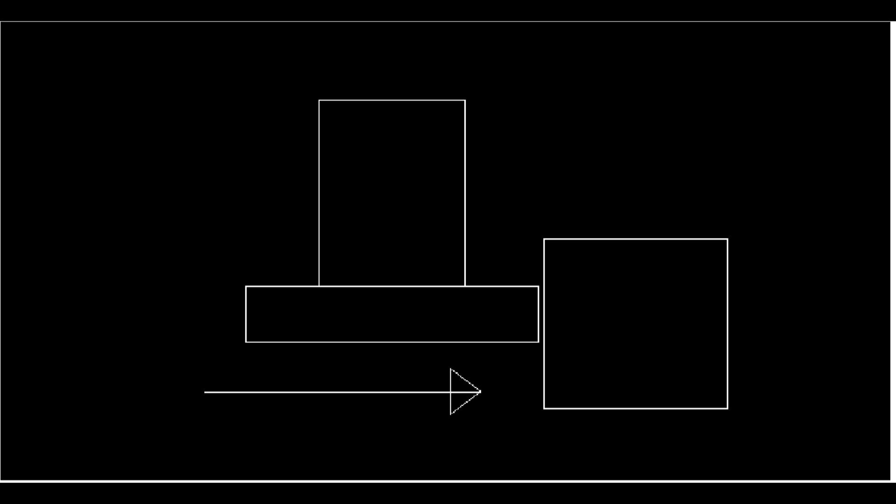Since you can cut in either direction, horizontally or vertically, there's of course going to be a different cutter setup for each of them, and I'm going to explain the horizontal first. A slitting saw would be a good example for this. Every cutter has several things in common. They will all have a rake angle, and they will all have some sort of a relief angle.

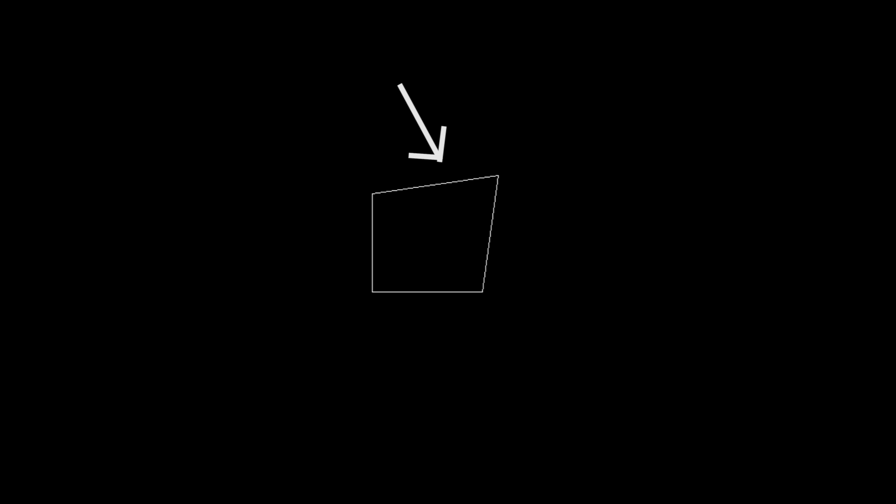I'm not going to explain all the intricacies of tool geometry. There are hundreds and hundreds of videos out there explaining it, but I will give some rules of thumb. Several things happen when you cut into a piece of material, and what happens determines the rake and the relief, along with the type of material you're cutting. The first and foremost thing you got to worry about is heat. I know this is pretty basic to some of you out there, but I'm going to explain it for the people that may not know quite as much about it and could benefit from it.

All tool steels are hardened by heating them up and quenching them in either water or oil. This sudden temperature change or shock makes the tool steel hard. When you reheat steel, it will re-soften. And for the purpose of this video, that's all I'm going to go into it. Okay, so why does heat affect the geometry of the tool? One reason is the tool's mass. The steel in the cutter acts as a heat sink. This pulls away heat from the cutting edge.

In O1 tool steel, which is usually what I use to make a cutter, it starts to become soft again at around 500 or 600 degrees, about the time it starts to turn blue. I've had some people ask me why I run cutters so slow. Well, this is the exact reason. When you run it slower, it slows down the amount of friction that you get, and it gives time for the mass of the tool to pull the heat away from it.

There's some good videos on YouTube that I tried to find again, but I couldn't, that show a magnified view of the cutter. The very tip will actually glow red. Well, that glowing red means it's up above 500 or 600 degrees, and that little tip area will get red, soft, and wear off. This is the entire reason that cutting fluid and coolant will help prolong the life of the tool: it simply pulls heat away from it and reduces friction.

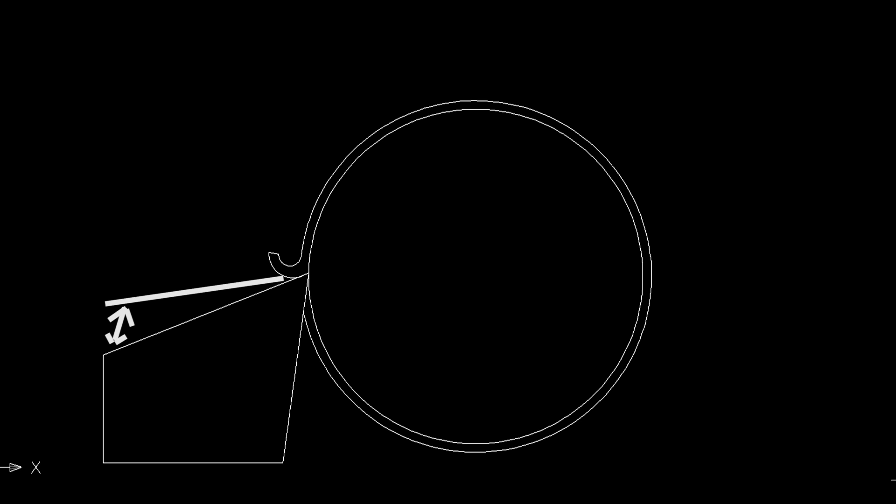Okay, so now we'll talk about another reason for tool geometry, and that's just flat out strength. If you make a steeper angle on the cutting edge, you take away a lot more material, which just flat out makes it weaker because there isn't as much steel there. This is why you will see a less steep angle for steel than you would for aluminum or wood. The material is much harder to machine off, so it needs something much stronger to keep from crumbling the edge off of the tool.

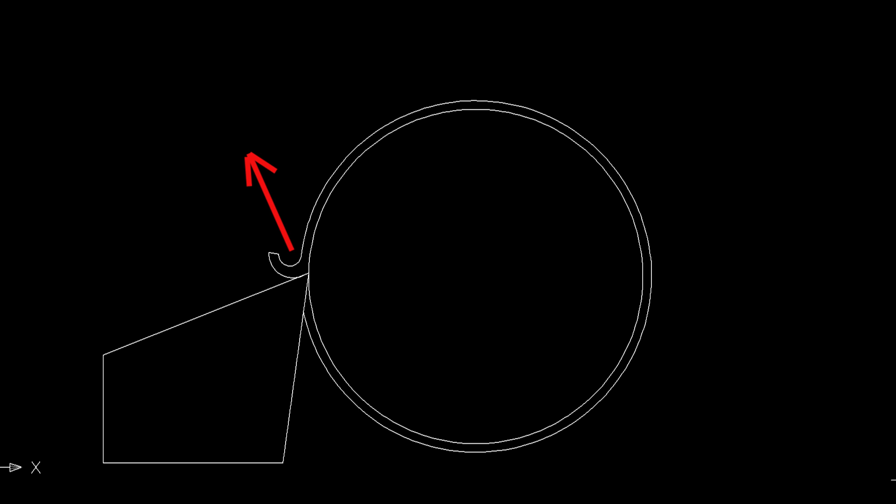The sharper the angle of the rake, the easier the chips evacuate off of the material. This can also reduce temperature. Over the years, manufacturers have figured out what the happy medium is between the sharp angle and the strength.

And for steel, that's usually in between 10 and 15 degrees, depending on the alloy of the steel and how hard it is. Okay, now with all the basics out of the way, how do you actually make the cutter? Here we can imagine a piece of round bar stock and a 4-jaw chuck. I'm going to remove the 4-jaw chuck in the illustration just to simplify things. I mostly just showed it to give you the orientation of the bar stock.

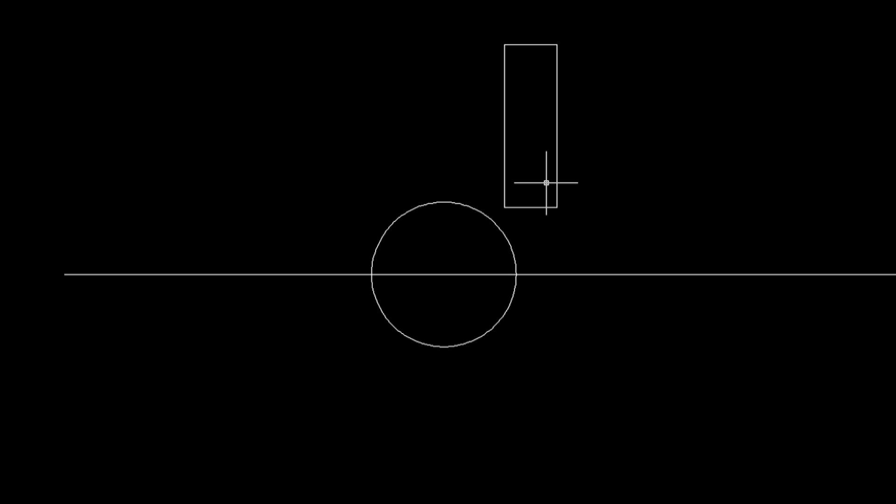Okay, so let's imagine I take an end mill and I cut it to the center line of this bar stock, trying to make my cutter surface. What is it that I'll end up with? I would end up with a cutting surface with zero rake at all, or a neutral cutting angle. This doesn't help me very much, because for most materials and most applications, you need a positive rake. So how do I go about getting this positive rake?

One way would be to tilt the head of the mill to the desired angle and cut the rake. The problem with this is then you have to go through all the process of retramming the head in to make it square with the table again. The method that I use the most is to cut past dead center. So you might ask, how does cutting past dead center make a rake angle? That doesn't make any sense. It's still cutting 90 degrees to the table.

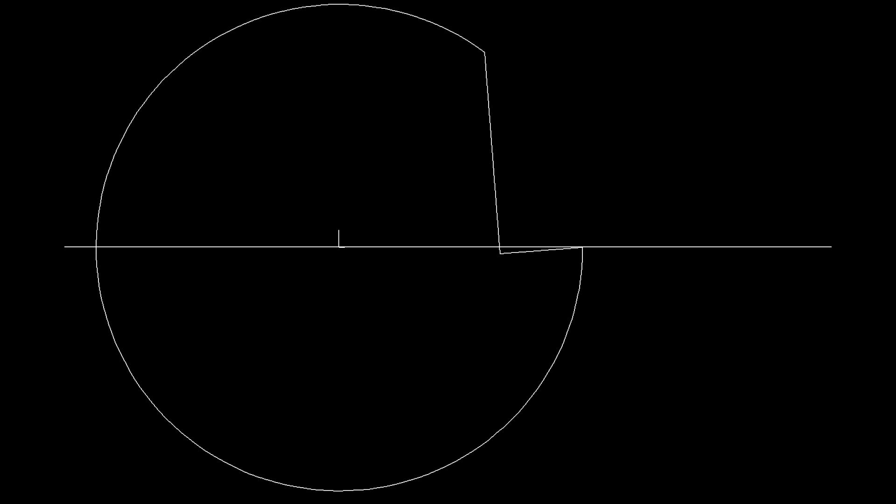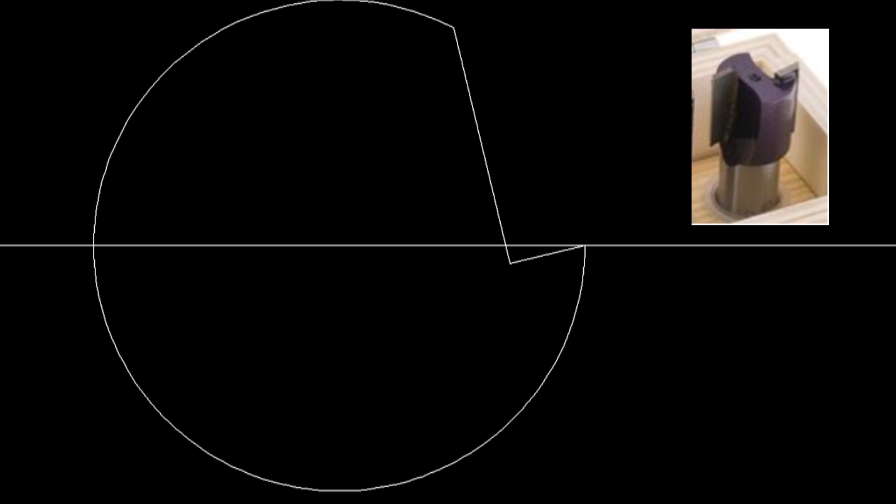Well, the reason is when that part rotates around and the cutting edge is at the center line, you now have your positive rake. A good exaggerated example would be a router bit. This one has been cut way past dead center, which makes a very steep rake angle which will go through soft material quickly. Notice how the cutting edges are actually parallel to each other.

Okay, so here's some rule of thumb. The more you go past dead center, the higher the rake angle increases. So if you're making a cutter for steel or some other hard material, you want to stay closer to dead center, and if you're making a cutter for something soft, the further past dead center you want to go.

Okay, I'm going to talk a little bit about the relief angle of a cutter like this. I had somebody ask me why I didn't cut a relief angle on the back of a reamer I was making for my revolver. And my answer is basically that it already has a relief angle. When you're cutting in a circular motion, the leading edge is the highest point. So everything behind that leading point is not going to rub because it's already cut the material out of the way. And the only reason for a relief is to keep the cutter from rubbing on the material to begin with.

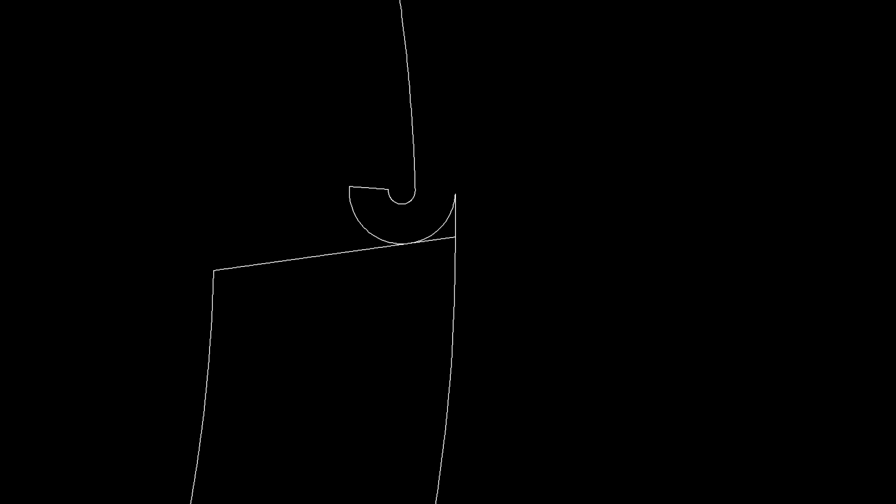The only reason you would need to add a rake in a cutter like that would be if you were worried if chips were going to get in between the cutter and the material. So yes, you could put a rake on a cutter like that, but if you don't need to, I don't, because I'm trying to keep as much mass as I can on the cutter because of the heat problems. One way to think about it, imagine the cutter as a snow plow. You're pushing the snow out of the way, and your wheels are rolling on the road you just cleared.

That being said, I'm no expert. Maybe some tool sharpener out there watching this channel might want to pipe in and say something about it. Anyway, okay, now I'm going to move on to what choice of cutters I use to make the cutter.

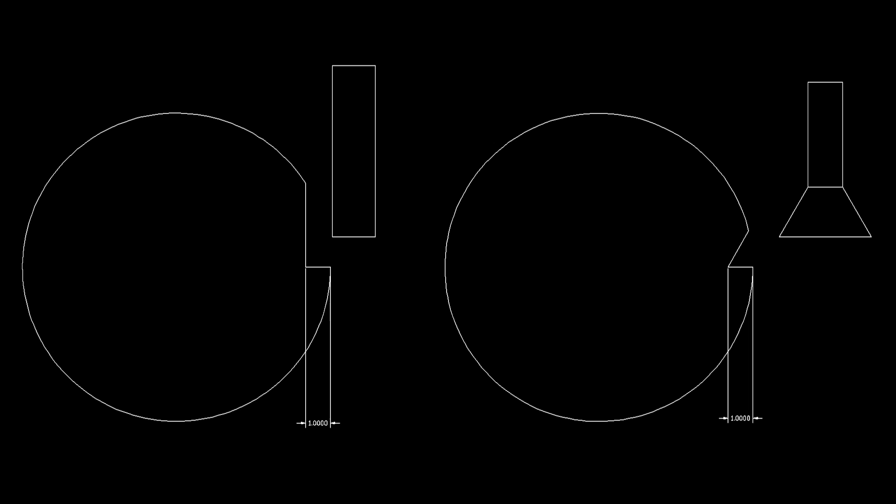In this example, you see on the left side, an end mill was used, and on the right side, a dovetail cutter was used. If you'd also notice, each of the cutters cut into the material the same amount of depth. Well, why is this even important? Well, for one, you'll be able to get more teeth on the one on the right than the one on the left. Notice the shape and the mass of the tooth. The one on the right has more material behind the leading edge, making that leading edge much stronger, making it much better for applications like steel, whereas the one on the left would be better for applications like wood. This is generally why I use a dovetail cutter most of the time.

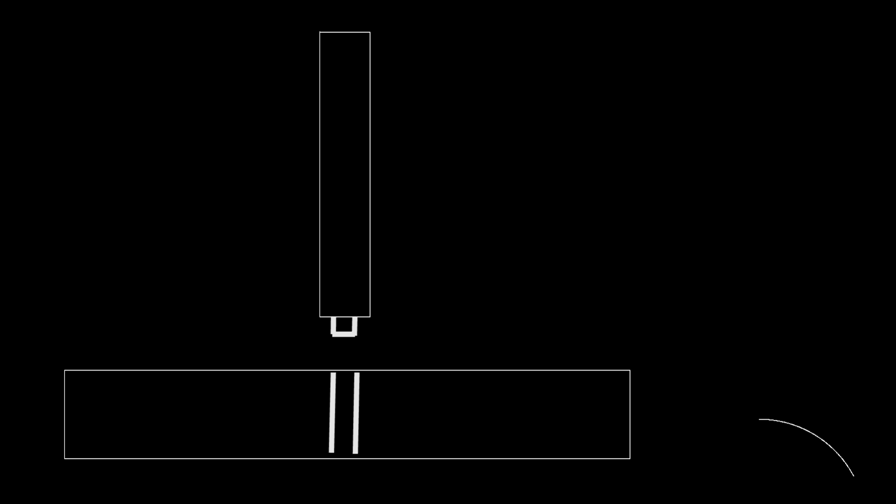Alright, this little bit of information is for cutters that go straight into something, like a counterbore type cutter. This type of cutter likes to go all over the place unless it is short and rigid, or it has a pilot on the end of it, with a pilot hole to guide it. So here we have an imaginary rotary table with a 4-jaw chuck attached to it and a piece of bar stock in the end of it.

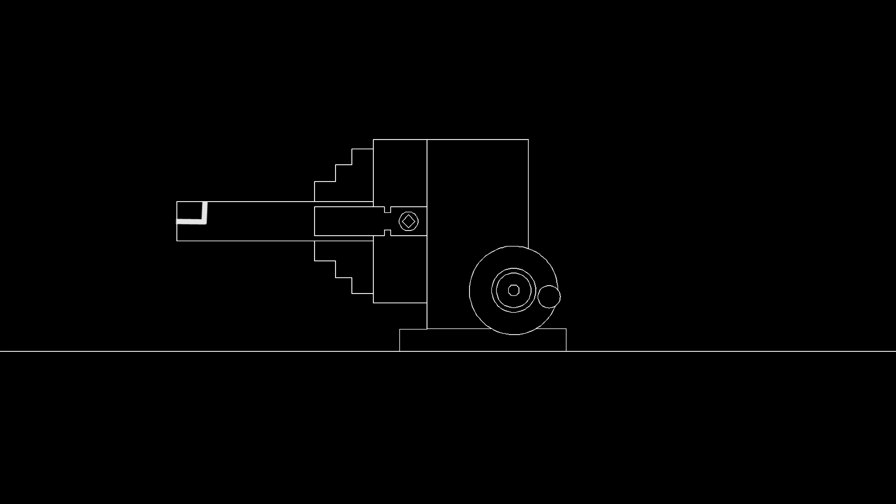In a counterbore type cutter, the rake needs to be on the front leading edge of the material. So in order to do this, you will come in with an end mill from the front. However, the cutting past center trick doesn't work here, because the rake is on the front cutting edge. If you mill straight into the end of it and go straight back, you're going to make a cut square to the table. The simplest solution I have found is actually just putting a couple shims under the back of your rotary table, and that's enough to tilt it to get your positive rake on your cutting edge. Here I'll show a little bit more detail. The leading edge of the cutter you want on line with center.

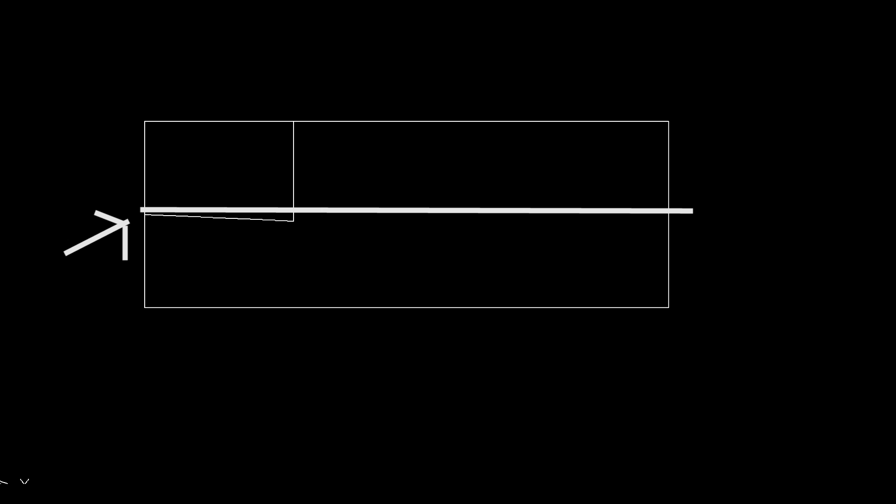This type of cutter definitely needs a relief. Why? Because the two flat faces will rub together. Remember our round sideways cutter? Its relief was built in.

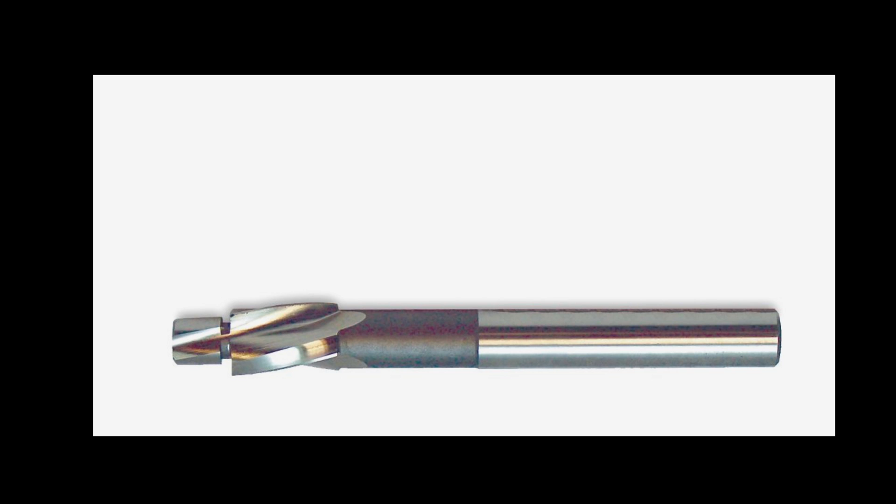Here's a photo of a commercially available counterboring tool. Notice how the flutes of the cutter extend into the pilot section. The reason for this is to extend the blade portion past the pilot area. The little groove that's carved into it is for the same reason.

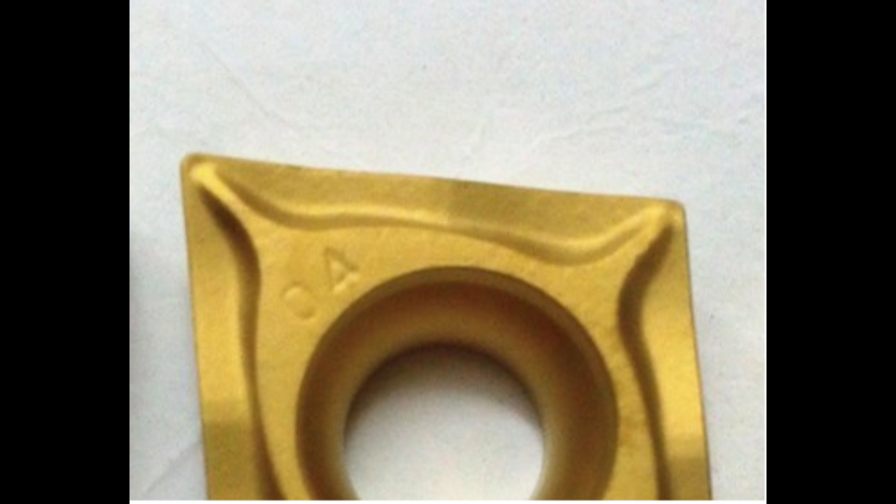The tools that make these tools always will have some sort of a radius on the cutting edge. So when that tool cuts the shoulder for the pilot and where the blade is at, it will leave a small radius. Here is an illustration of this. This little radius left behind by the nose of the cutting tool that made this part would come into contact with the part that you're trying to cut.

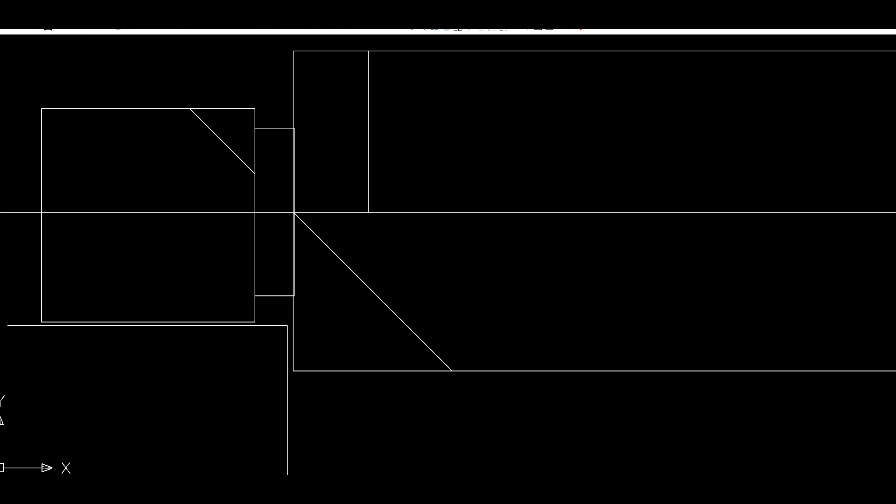When this happens, the radius and the corner of the part will rub together and the cutting edge will never make contact with your part. This is where the undercutting and grooving come into play. As you can see in this example, the groove gets rid of that radius and the cutting edge actually goes further and even below the pilot point.

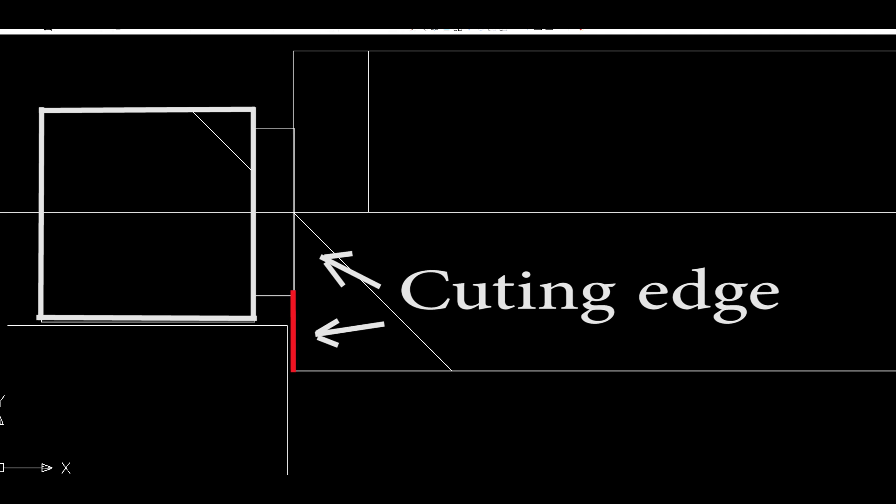Now we come to the chambering reamer. I saved it to last because it has a combination of attributes from some of the other cutters. Although it is technically a horizontal type cutter, because of these little tapers right here, it actually can cut vertically also. Or in other words, it cuts to the side, but because of the tapers, it can plunge into something.

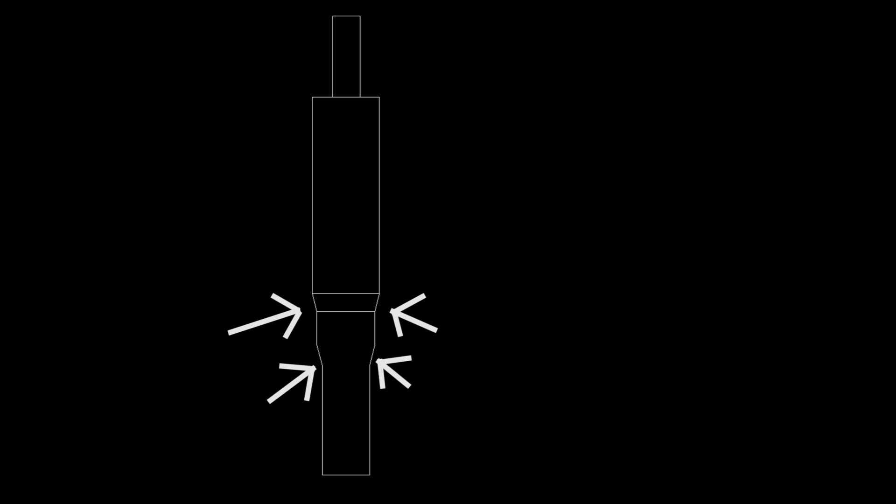To make this, you would set it up very much like the very first cutter I showed in this video, like a slitting saw. Just think of it as a very long slitting saw. The tapers can be thought of as just an extension of the same thing. They're still cutting straight out, but because you put them in a taper, the straight out is at an angle.

When you cut the flutes, you don't have to do anything special for the taper portion. You just cut a straight flute. As long as the flute is deep enough to go past the angle, then you're going to have a sharp edge on that angle. So to clarify that a little bit, basically you set it up just like you would with a slitting saw and make just single cuts for your flutes.

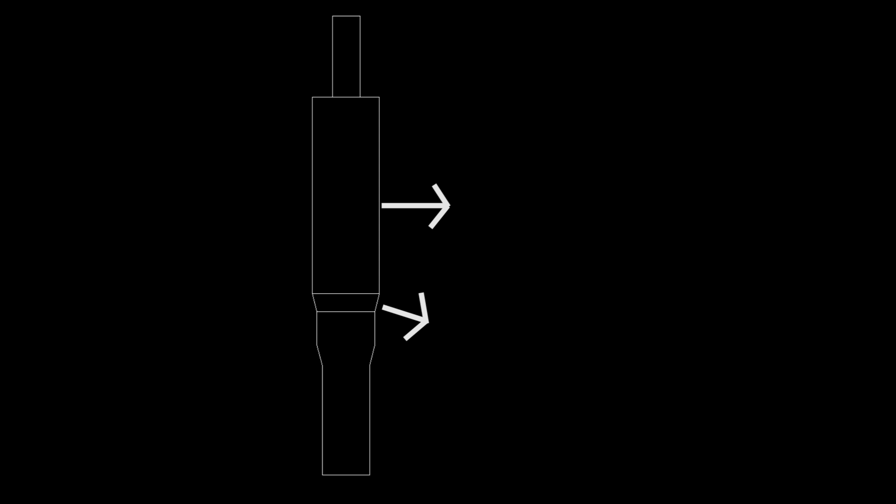Imagine you could look at it directly from the top. This is the dovetail cutter cutting into it. The cut you make would have to go the entire length of the cutter. Notice the undercut at the pilot area. This is for the same reason as I explained earlier, so that leading edge of that angle will have a sharp edge all the way to the pilot area.

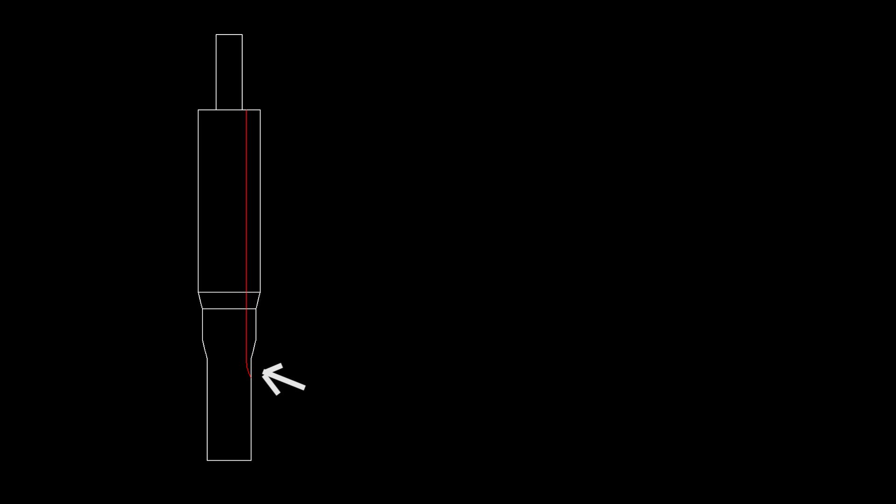Okay, let's talk about the tapers a little bit. Why does it even have tapers? Especially when the bullet itself doesn't really have tapers around its case or anything. What's the tapers for? My best guess is, and it is a guess, it's just easier. If you were going to have to make an edge like this, you'd have to sharpen that little corner right there, which would make it very difficult.

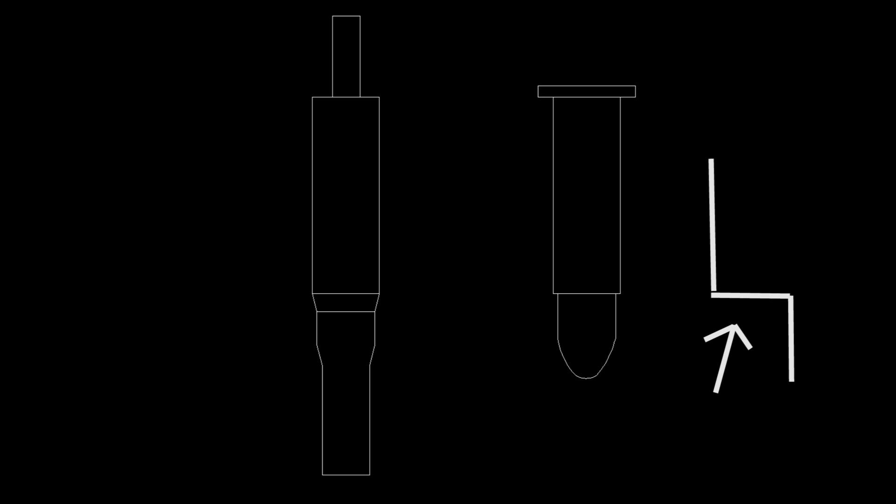Remember, because of the taper, all you have to do is make one single cut down the length of it. Also, I would believe it'd be helpful in self-centering. And another answer is, if it doesn't hurt and it works well, why not use it? Here's an imaginary bore that we bored out. And we'll overlay it with the shape of the bullet.

The first taper actually cut the lands. The second taper, you'll notice there's just a little bit of an air gap where the case meets the bullet. This little air gap will make no difference whatsoever. So again, if it works and it's easy, why not use it?

Well, that's probably all the information I can fit into a video like this without making people fall asleep. I hope you liked it. I do want to repeat, though, that I'm not an expert at this. This is just stuff I've learned that has worked for me. There might be other information out there that's better than this. I was just letting you know how I did it.